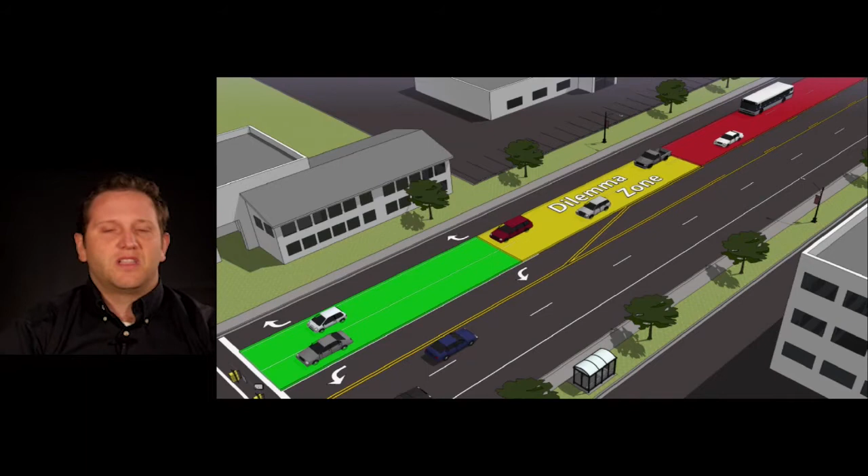So the dilemma zone, what we're talking about today, isn't a physical dilemma zone or what they call a type 1 dilemma zone. It is the type 2 dilemma zone, or the region 2.5 to 5.5 seconds away from the stop bar as you're approaching a green light. It's that, oh crap, do I gas or brake moment. That's the moment that we're trying to prevent. And so dilemma zone protection is the tool to do that, as you're aware.

So let's first talk about dilemma zone protection and what it's defined as. It's defined as 2.5 to 5.5 seconds away from the stop bar, so in time. So let's take an example of what is commonplace in dilemma zone protection today. So if we have a vehicle at 700 feet that's traveling 50 miles per hour, let's calculate its dilemma zone. So the way we do that is we take 50 miles per hour, we convert that 50 miles per hour.

I had to get that bouncing thing somewhere in my presentation.

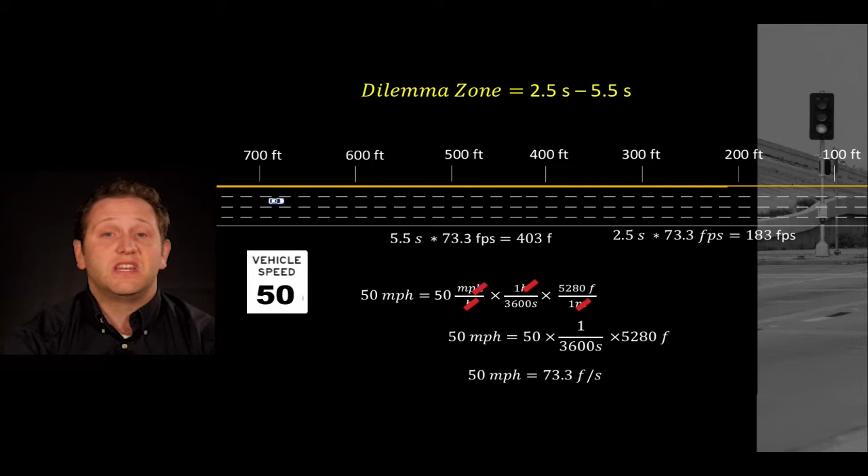We convert that 50 miles per hour to feet per second, and we get 73.3 feet per second. We take 73.3 feet per second, times it by 5.5, take 73.3, times it by 2.5, and that gives us the inner and outer boundary of the dilemma zone for this vehicle. So that's at 403 feet and 183 feet. And you can see there in the yellow that that's the dilemma zone region. So that dilemma zone region is going to be for that vehicle.

The design speed at this approach is actually 40 miles per hour. So 40 miles per hour is a little bit different than 50 miles per hour, right? So let's talk about what that is. So if we do the design speed and we do 40 miles per hour, and then we convert that to feet per second, we would get 58.6 feet per second. So 58.6 feet per second multiplied by 5.5 and then multiplied by 2.5 gives us the 322 feet and then 146 feet.

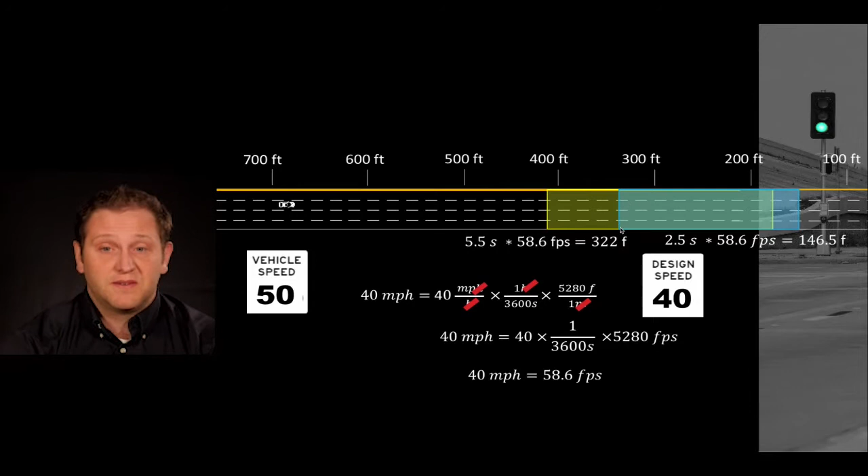So if we were to design this intersection, most likely we would put our loops right there at the 322 feet. So when the vehicles came into the approach, they would extend for 3 seconds at that 322 feet. So let's take an example here. This vehicle comes in, all right, freeze frame there. The signal goes to yellow. What had happened? Well, the vehicle hadn't quite reached its dilemma zone yet, and so it hasn't quite extended for it. So this could be a potentially unsafe situation.

Now let's take a look at another example on the efficiency side. So on the efficiency side, if we have vehicles coming in, freeze frame here, what happened? Well, the car is through its dilemma zone, traveling 50 miles per hour. The next car is about to enter its dilemma zone, but the intersection didn't gap out, providing it's at the end of the cycle time. It didn't gap out because it had hit the loop, it extended 3 seconds, but there's a 90% probability that this car is probably going to run the red light or run through the yellow light.

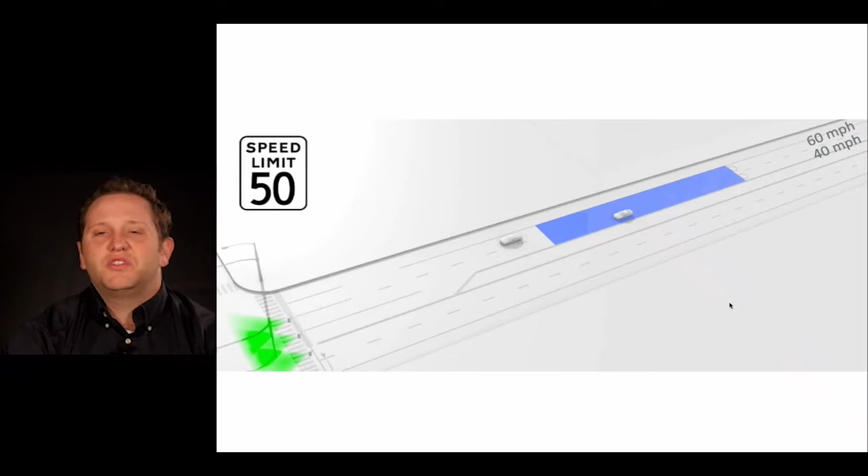And so that can create an inefficient situation. All right, now that gets compounded even more because there's two vehicles coming into the approaches at the same time, making for a less likely chance that we'd find a good gap out. So that's kind of the current situation. I want to show a couple more animations to kind of help illustrate that point that I just talked about in a moving situation. So let's watch this animation.

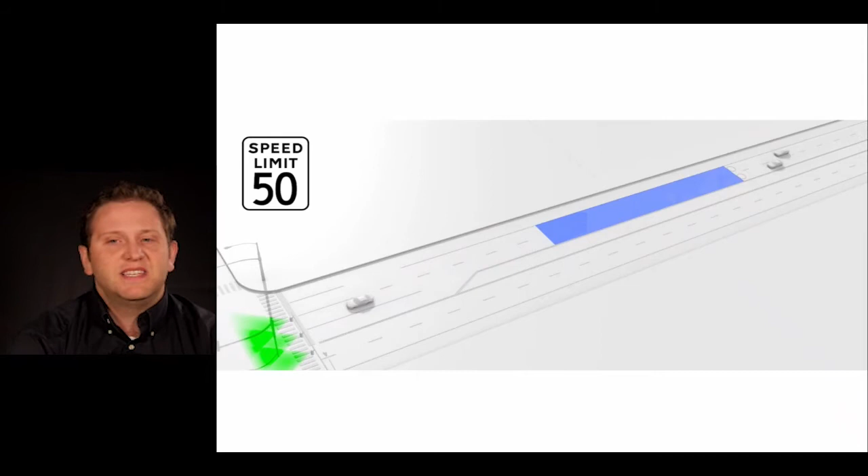You'll see the top vehicle is going 60 miles per hour. The bottom vehicle is going 40 miles per hour, and the design speed is 50 miles per hour. So as these cars approach the intersection, notice that the car that's going faster than the designated speed isn't being protected for a portion of it, is protected for a portion that needs to, but then overextends until it gets

all the way through. The vehicle on bottom going a little bit slower, it got protection when it didn't need it, got the right protection for a portion of it, and then wasn't getting the protection it needed and ended up running through on red. So this static point detection system can cause issues for dilemma zones and dilemma zone protection.

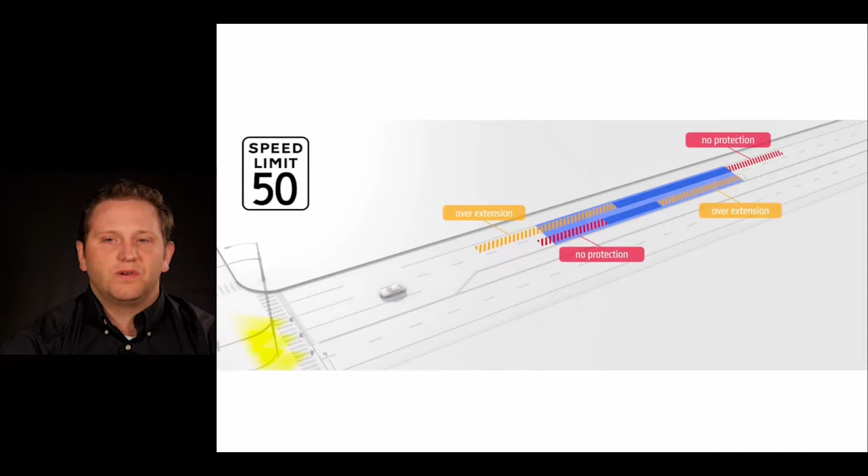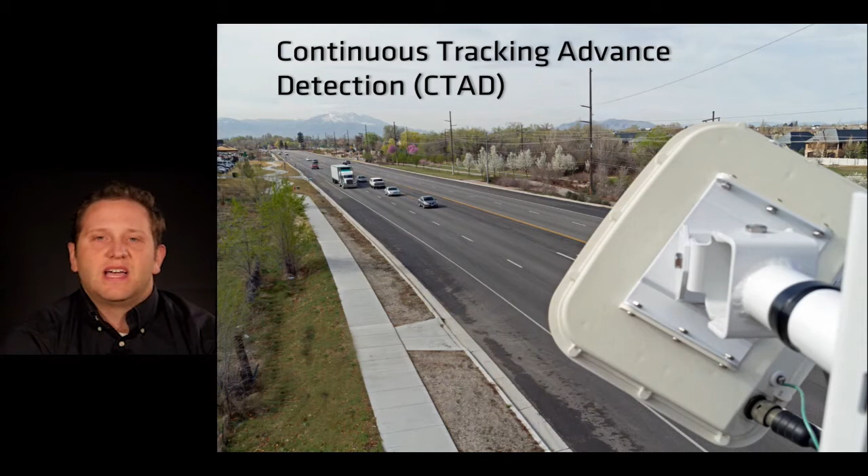So Wavetronix kind of went to work on this to figure out what was going on, and we came up with a pretty good solution. And it has to do with what we call the SmartSensor Advance, which does continuous tracking advanced detection. So basically, it'll detect the vehicle at some distance away from the stop bar, and it will track it continuously to the stop bar.

So in 2006, Wavetronix first came out with the SmartSensor Advance, and it went up to 500 feet. It provided dilemma zone protection for design speeds from 40 to 50 miles per hour and protected vehicles as it came into the intersection. We later watched that video that we watched at the beginning and realized that for truck protection, we needed to get a little bit more distance because a truck's dilemma zone is a little bit larger, from 7.5 to 2.5 seconds instead of 5.5 to 2.5 seconds.

And so we went to work figuring out how could we make that work. And we created another device, the SmartSensor Advance Extended Range, that can detect up to 900 feet away from the stop bar. And typically you'll see vehicles come in for the extended range about 800 feet. You'll see the large trucks come in about 800 feet, and then the cars will come in about 500 feet for the normal advanced sensor.

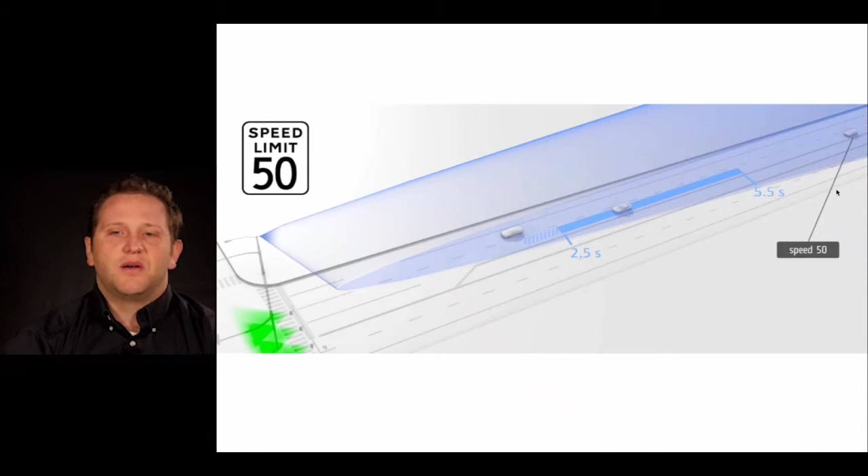So let me show you how it's a little bit different than a static point detector because we're continuously tracking. Notice the blue shape here is the entire footprint of the SmartSensor Advance. The blue square that we're looking at there is the typical dilemma zone for the vehicle that's traveling 50 miles per hour. Now in this case, the vehicle is going to be changing speeds, for whatever reason. They're coming to an intersection, and that's a very flux place for vehicle speeds. So let's watch this animation and see how it works.

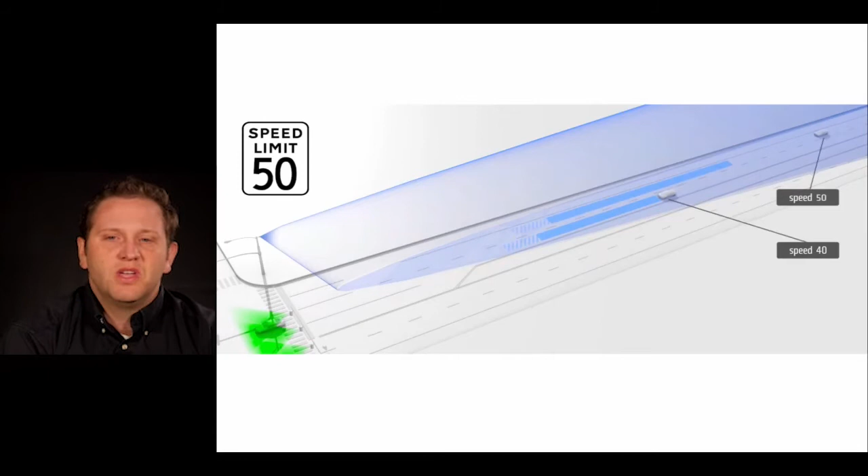So that vehicle is traveling 50, slows down, and the dilemma zone changes with the vehicle. And so if the vehicle is going faster than the designated speed, the dilemma zone moves with the vehicle. If the vehicle is moving slower than the speed, then again, it moves with the vehicle. You'll notice that the end result is that both vehicles make it through on yellow, which is the intended result.

So here's a side-by-side comparison of the two. Notice that on the top we have the loop detection, and the places where these normal traveling speeds, it's not ridiculous for a car to be going 10 miles faster or slower on any approach, are actually being protected, or where there's a safety or efficiency concern.

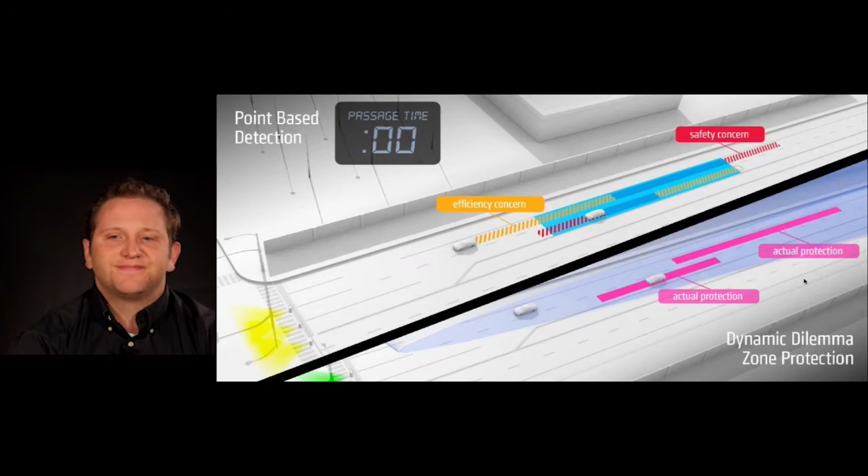But in order for this to happen, there need to be some other changes. Some of those changes need to occur in the controller. The controller needs to have the passage time changed.

I've seen some of you traffic engineers move your hands that fast. I'm not quite there yet, but I'll get there.

So that passage time, so you go to the controller, and you normally would have a 3, 5, 6 second extension for that car to get safely to the intersection. But you can lower the passage time now, because the way that it works is the Advance continuously puts a call into the controller saying, hey, there's a car here, protect it. Hey, there's a car here, protect it. And that passage time keeps that vehicle safe until it's passed through that point. I'll show an animation here in a minute.

So again, just to reiterate my point. With the traditional loop system, if you have a 3-second passage time, you're always trying to get to that 0. But when a vehicle hits a loop, it extends 3 seconds, it extends 3 seconds, it extends 3 seconds. With the SmartSensor Advance, instead of continually extending 3 seconds, you can hold it at 1 second or a half second, depending on your roadway. And you hold it, hold it, hold it until the car's no longer in the dilemma zone, and then you drop it down.

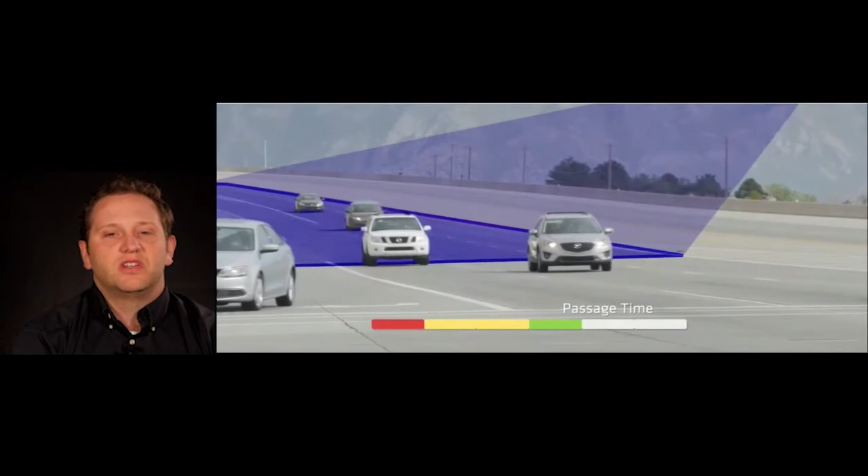And you'll notice that once that back car is out of the dilemma zone, that call will go out of the controller, and it'll attempt to gap out. And in this case, it will gap out.

So to review, this is an exciting piece of information here, right? That we've created a radar device that continuously tracks the vehicle. So the big takeaway here is that the SmartSensor Advance protects vehicles traveling at speeds other than the speed limit. If every vehicle is traveling the speed limit, then a static point detection system would work. But in this case, where vehicles are always changing speeds at the intersection, the radar device, the Wavetronix SmartSensor Advance, can help track the vehicles as they come into the intersection.

So we're going to change gears a little bit here, and I'm actually going to show you a setup and some of the configuration in the software. Before I jump to that, though, I do want to give some of the results that we've seen from the SmartSensor Advance. It's not a new product. It's been out for almost 11 years now, and there's been a lot of testing, and there's a lot of agencies that have fully adopted the SmartSensor Advance. So let me just give two examples here.

So one was a Bradley University study where they found that there was a 58% reduction in red light running with the SmartSensor Advance compared to loops. Quite a sizable and significant reduction of red light running. Ohio did another study, and in that study they were just measuring intersection accidents over time. And what they found is that intersections where they put the SmartSensor Advance in, more rural intersections in this case, had a 38 to 100% reduction.

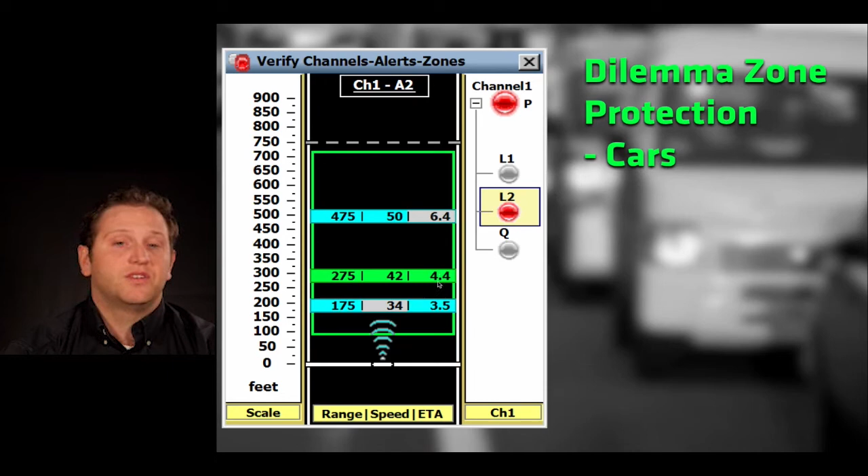So if I were to set up a dilemma zone protection for cars, notice that that's the L2 light indicator here. So this call represents a call that would just be made into the controller, a typical extend call. This green bar here signifies that L2 is making a call into that controller. Notice at the bottom we have range, speed, and ETA. On the left side here, the range of that vehicle at this particular moment in time is 275 feet. The speed of that vehicle is 42 miles per hour, and the estimated time of arrival is 4.4, which is in the middle of the 2.5 to 5.5 seconds.

And so these are the settings that are controlling this indicator here. So notice there's a range indicator here. The range here is from 100 to 720 feet. So basically anywhere in the approach. The speed has to be going over 35 miles per hour. This is probably a 40 mile per hour approach that this intersection was on.

And so that's why the speed is set at 35 miles per hour. And then the ETA is 2.5 to 5.5 seconds. You'll notice that the car underneath it, even though it has an ETA of 3.5, it doesn't meet the speed criteria.

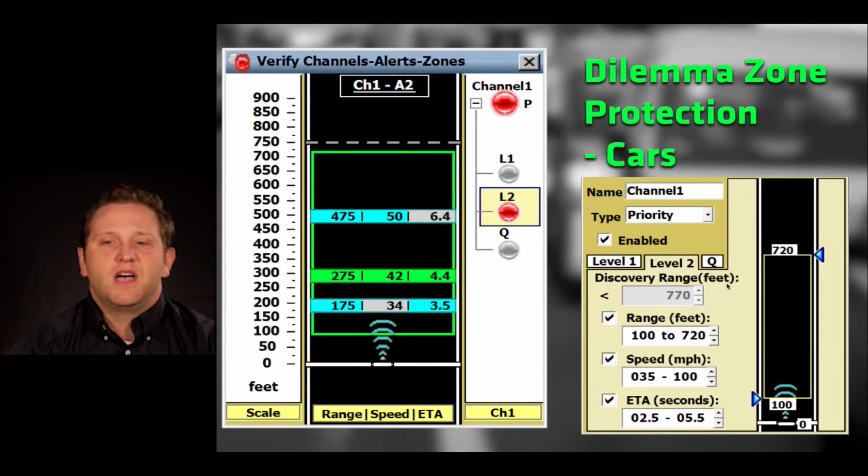And so this vehicle is not going to put a call into the controller, because at this point the engineer has decided that the phase will safely terminate without giving a call to that particular vehicle. And so this is a typical setup for dilemma zone protection for cars. Let me show you one for a truck now that could be on the same call.

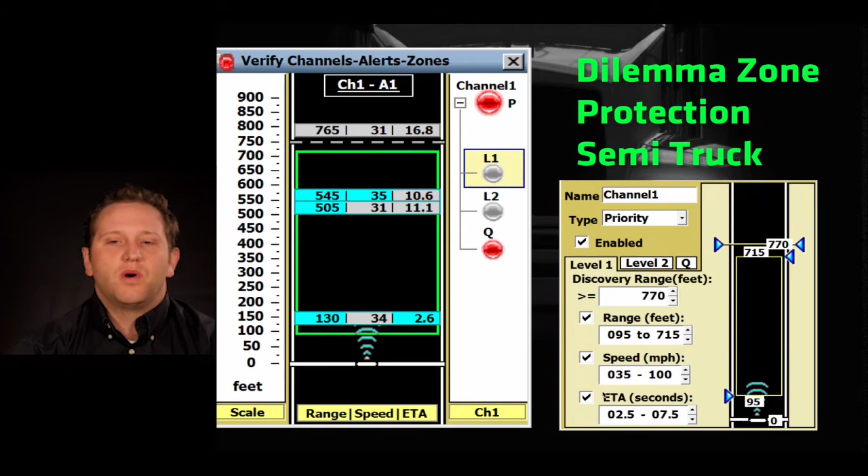This is what we call the L1 indicator here. So that L1 is level 1, or a priority call, or a large profile call would probably be a better way to put that, where the settings are all similar on the range and the speed, except for the ETA. The ETA is 2.5 to 7.5 seconds.

So as this truck continues to come to the approach, the vehicle at the very top point, near the CH1-A1 in the top part of the screen, the range is 765 feet away from the stop bar. The speed is 31, and the ETA is 16.8 seconds. So not until that ETA is 7.5 and the speed is over 35 miles an hour will a call be placed in the controller.

So the engineer can kind of decide. He knows the roadway the best. He or she can decide what the best settings are for the controller and for the sensor. And then we, of course, provide feedback for that as well.

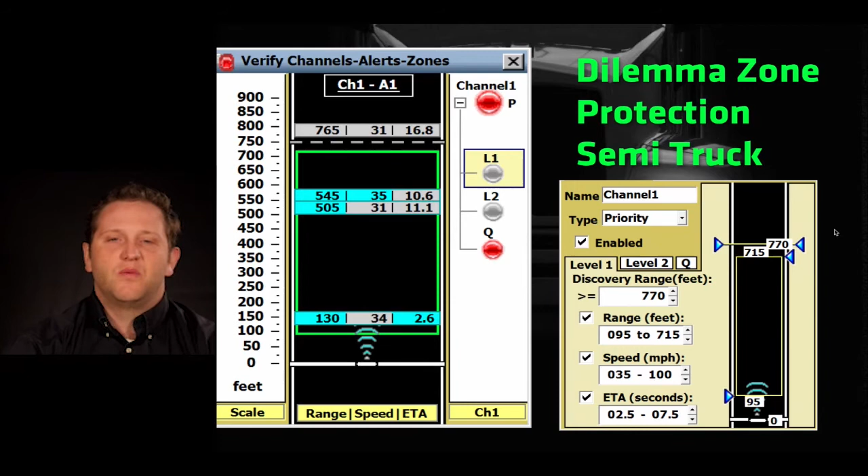And lastly, one of the last applications that we do is called queue reduction. Notice this vehicle here. This is going to be most used on your intersections that don't have stop bar detection, that are frequently on min recall, and that are your main corridor or main line roadways.

And notice the settings here. We have two filters active. One of the filters is from 100 to 155 feet, and the speed is from 1 to 35 miles per hour. And so what this can be used for is to extend the call early on in the phase. So you can extend and say, okay, we need to keep this light green to get this queue out of here. And I'll show you the video here in a minute.

But notice that that's the call going there on the queue portion of it. And this vehicle got a call because it's going slower than 35 miles per hour and is within 100 to 155 feet from the stop bar.

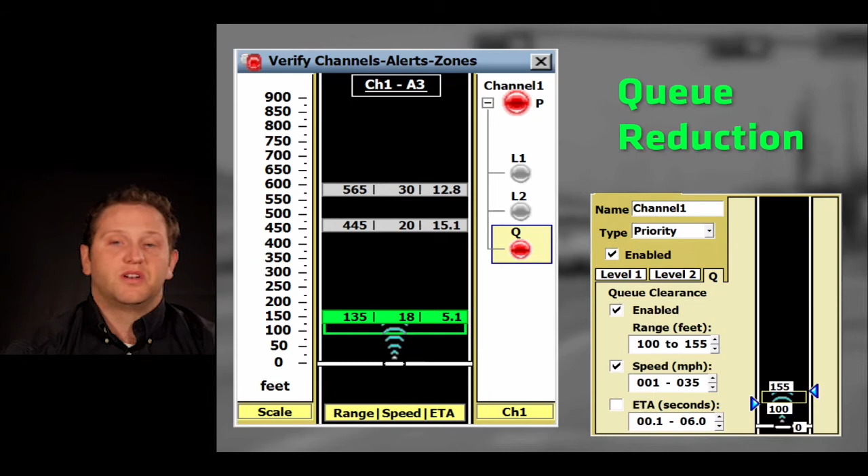All right, so this is my favorite part. This animation shows all of the things happening at once. You'll notice here we have the Q, we have the L2 and the L1 again. And over here we have a little clock that represents the cycle time for this controller. I'm going to play it here and then we'll talk about it.

So notice on startup, we just got our green, it's in the min green now. We've lowered our min green substantially. And now the sensor is going to output to the controller saying, hey, there's cars still here in a queue. We need to keep it green until the next vehicles come to the approach.

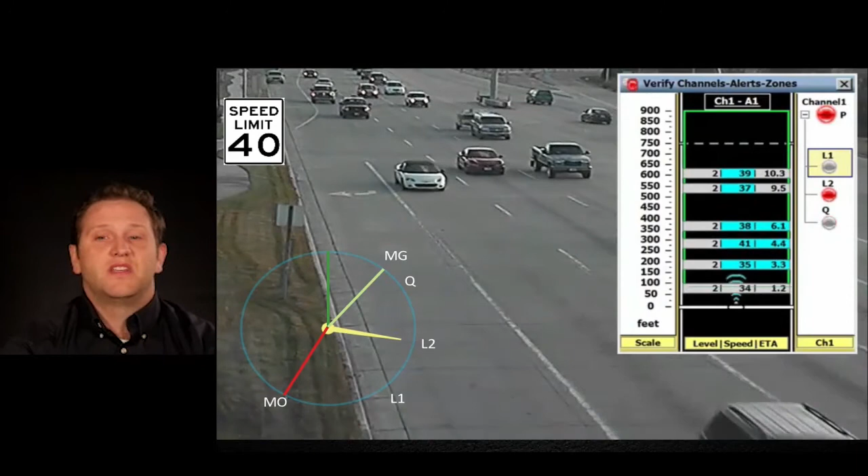Now, as the vehicles start to flow in from the next platoon arriving, that L2 light is indicated, signifying that there are plenty of vehicles here meeting the criteria of going faster than 35 miles an hour and between 2.5 and 5.5 seconds. You'll notice that semi-truck is starting to come into the picture there. And that truck is outputting to the controller a little bit longer than the cars because of its size.

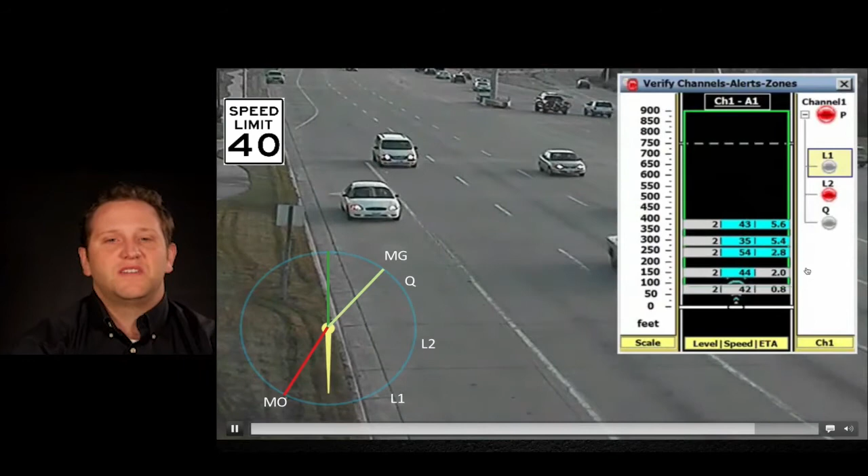And it outputted until all of the cars are safely through and they found a significant gap, and then we'll achieve gap out right there and gap the intersection out, providing the other side has a gap as well, finding a safe phase termination. This was obviously an exaggerated example, but because the vehicles aren't all traveling 40 miles an hour exactly, the SmartSensor Advance does a good job at finding those gaps and safely terminating the intersection's phase.

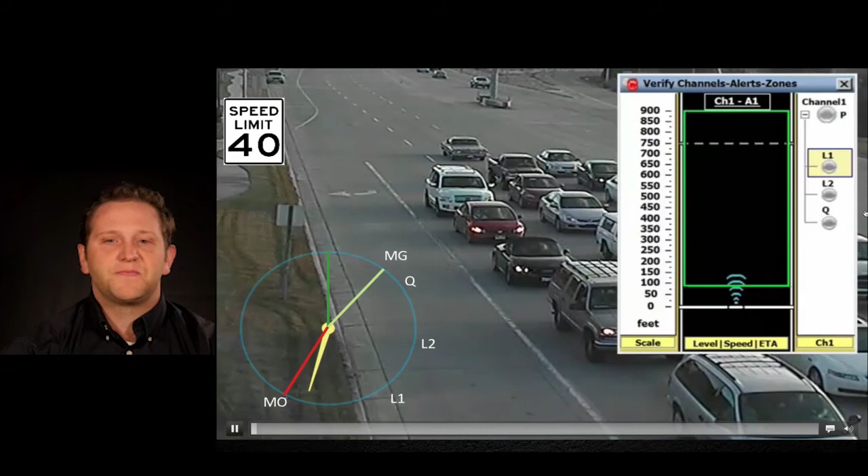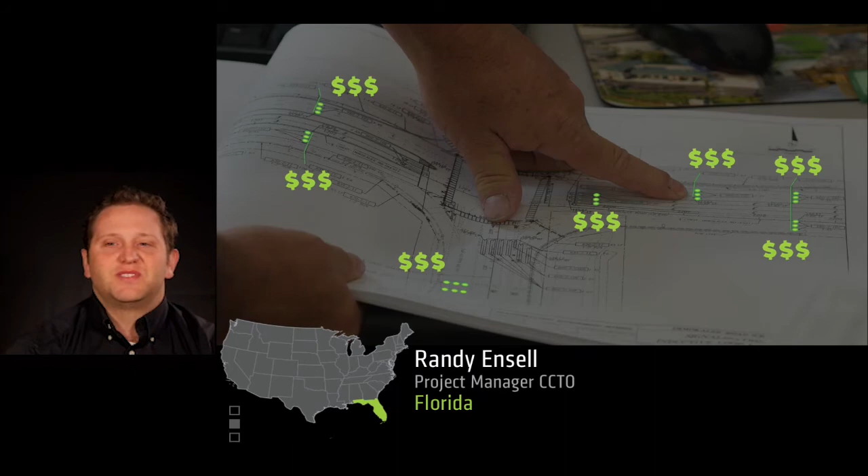So Randy Ensell, project manager in Florida, was going to put loops on a project similar to this, where he was going to be doing multiple of these things. But what he found is that it became somewhat cost prohibitive to do all that trenching and work to get all those loops in the different places that he needed. And he found with the SmartSensor Advance that he could do multiple things or multiple applications with just one sensor. And so he used the SmartSensor Advance on some of his projects.

I'm going to change gears a little bit here now, and I'm going to talk a little bit about cabinet integration. So we have multiple ways for these calls to get into the controller. The most common and the simple way that everyone's familiar with is through rack cards. Most detection devices use rack cards, and ours was no different. So we have a little surge protection and communication device here in the middle yellow square, and then that would put calls up into the rack cards, and those rack cards would make the call to the controller. The controller had a lower passage time, and that would be how the call would go all the way to the controller.

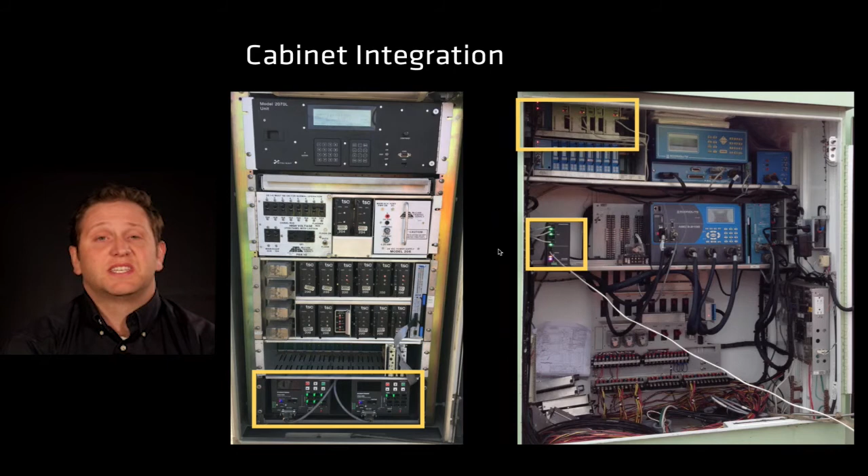Now, we've recently come out with a new device. The Click 650 and the Click 656 are cabinet integration devices that have SDLC on them. So for your NEMA TS2 cabinets, you'll be able to get your calls straight into your BIU, BIUs 9, 10, 11, and 12, without having to do rack cards. So that means that you can get multiple channels, and you basically do what you can do with software instead of using the hardware.

And then there are some integrations into 2070 cabinets as well. But there are some things that you need in your controller, your 2070 controllers, like a 2E I/O card. If you have that card, you can do an SIU to BIU, a serial interface to a BIU connection to get the calls into the controller that way. And the software has to be made for it as well. But that can significantly minimize the amount of cabinet space you have to use by using the Click 656.

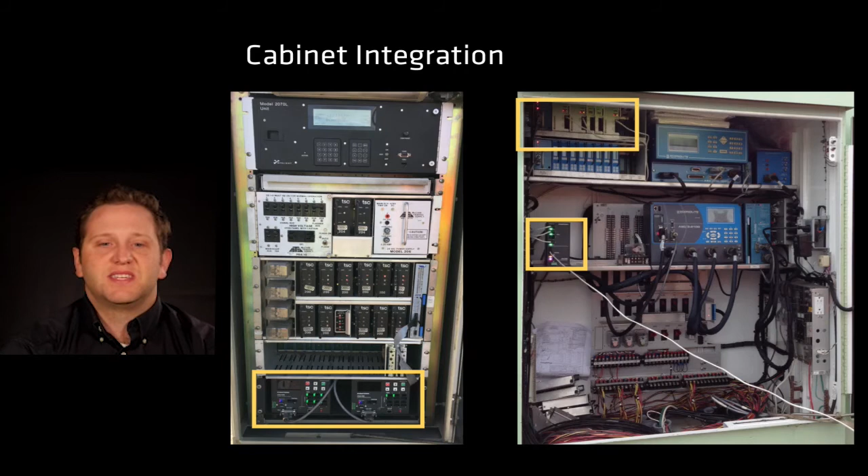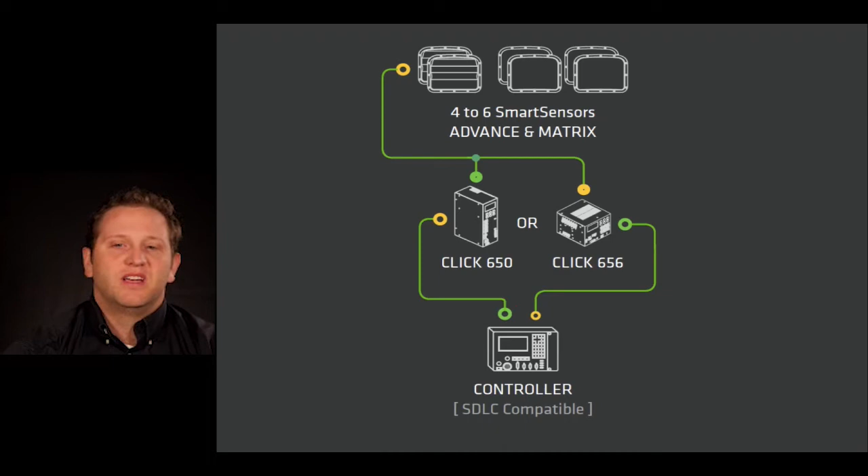And again, the Click 656 can handle up to 6 sensors, and the Click 650 can handle up to 4 sensors. And so that's what this little animation shows, is that you can go from either Click 650 or Click 656, and then go straight into the controller. And so that can minimize your cost significantly.

All right, so now I'm going to jump into a little bit about the design. So mounting location is important for any detection device that's non-intrusive to help minimize occlusion and help maximize detections. And so some of those detection positions for the SmartSensor Advance are here. So A is the most ideal detection spot for the SmartSensor Advance. B is also a potential option there that you'll see on the side. C on the other side. The sensor needs to be mounted at least 17 feet in the air.

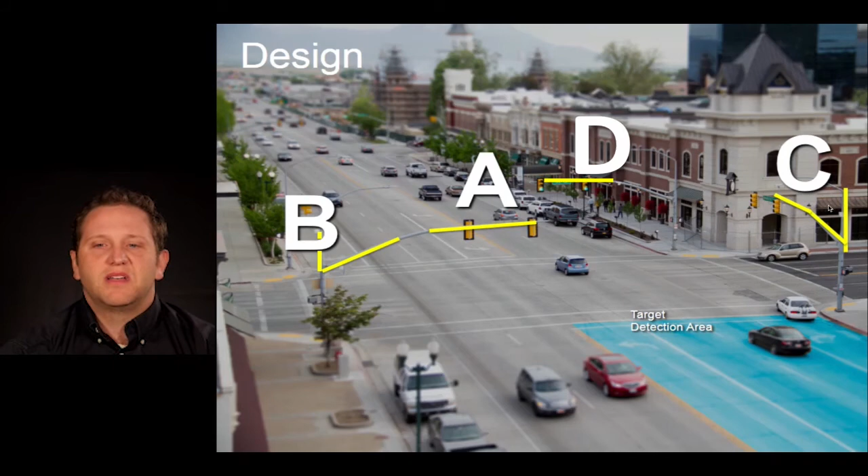And then D. And D you would use if you wanted to measure red light running or something to that effect. Or maybe more optimal queue detection. The important thing is that the sensor needs to be within 50 feet of the middle of the detection area. So there are a lot of mast arms out there that just have a cement pole, for example, in the place of C or B. And so in that case, we would frequently recommend just to put it at C and put it about 30 feet in the air. Anywhere above 17 and under 50 would work, but the middle region there is about the best. And then just pointing at the detection area.

So one of the most significant things about the Advance is that it's non-intrusive, and that gets people out of the road. Dave Townsend was on the UDOT signals team, and his job was to go out and locate loops in the middle of the roadway. So as you can imagine, that wouldn't be too fun of a job to have cars whirring by. Well, it's something we've all done. But when cars are whirring by you, it can cause some anxiety. And so he recommended to the signals team, hey, why don't we change the policy?

And so the policy was changed to only use SmartSensor Advance, keep people out of the roadway, and to continuously track the vehicles in for safety. So for two safety reasons, they changed the policy to only use SmartSensor Advance on 40+ mile/hour roadways.

One of the things that we do in our design as well to help people when they're designing our projects newly is we do have a team of engineers here who can help review your plans. So you can contact them at support@wavetronics.com. You can send them the plans and they'll help provide you. We can also provide you CAD drawings.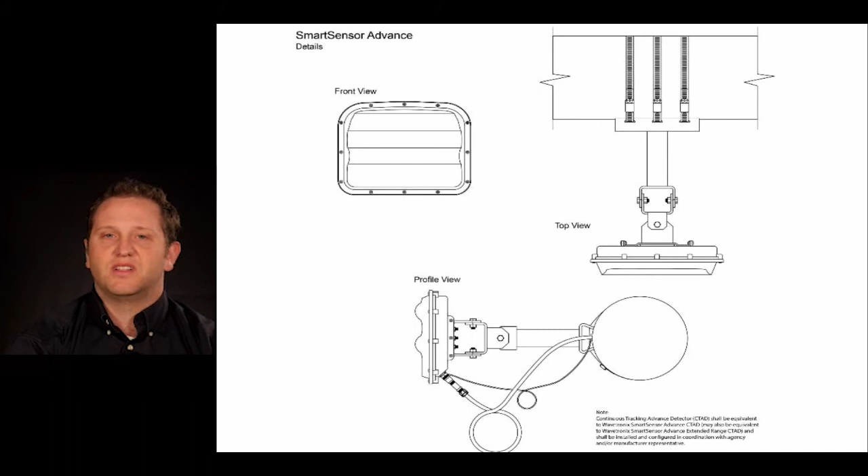And this is just a CAD drawing of the sensor's mounting. You'll see here that there's the sensor head, the mounting bracket. You can see a grounding lug, grounding wire there, and then the actual communication wire and how it can go into a pole. The mounting of these products is fairly simple. And so providing the right things on the plans can make sure that contractors install them accurately. And that's something that Wavetronix is happy to help with, and very good at as well.

One of the designations that you can use for the sensor is a CTAD detector on your plans. So calling it a CTAD detector, the continuous tracking advance detector, helps contractors differentiate the mounting locations from the RPD, or radar presence detector, or RVPD, radar vehicle presence detector, that is used for stop bar detection. And so for the mounting location, as you can see on these plans, we also have these footprints that we can provide.

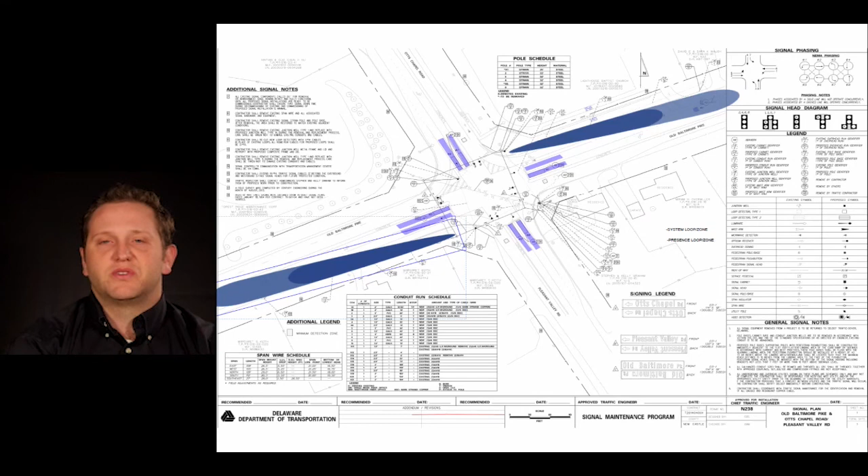So the 3 most important things to put on your plans are mounting location, specifying that it needs to be a continuous tracking advanced detector, and then lastly, lowering the passage time. The passage time does need to be lowered. There'll have to be some communication there because it is different than a static point detector, like a loop or a puck or a video. But those are the 3 things that need to be specified in the plans. And again, Wavetronix is happy to help. We've got a good team here that's done that.

So before we wrap up here, I just wanted to explain one of the really cool things about the SmartSensor Advance. If you use the SmartSensor Advance to detect the vehicles in advance of the intersection, and they're continuously tracking in, you can make your intersections really snappy because you're going to be getting vehicles through on the main line, and then coupled with the SmartSensor Matrix on the minor movements with long detection zones, you can lower the passage time

both for your advanced detection, and with a long detection zone, you can do it for your minor movements as well, gapping out as soon as vehicles are no longer present. That's a really exciting application, but we'll have a webinar more about that another time. So that's all for that one.

Perfect. It's about how the SmartSensor Advance works in coordination. So in coordination, there's a setting in your controller called coordinated actuated signal timing. And what coordinated actuated signal timing does is basically it borrows a little bit of time from the end of your coordinated corridors to find a safe point to try and terminate the phase.